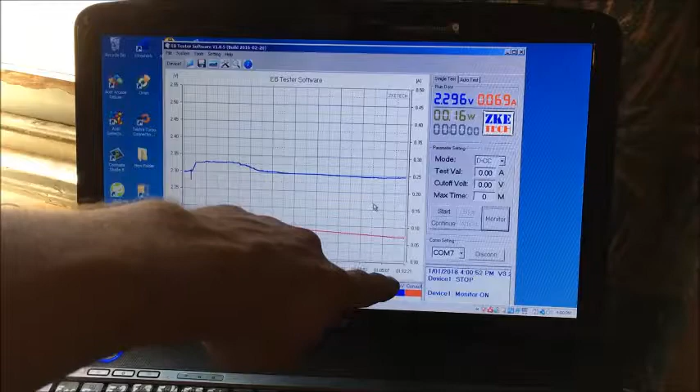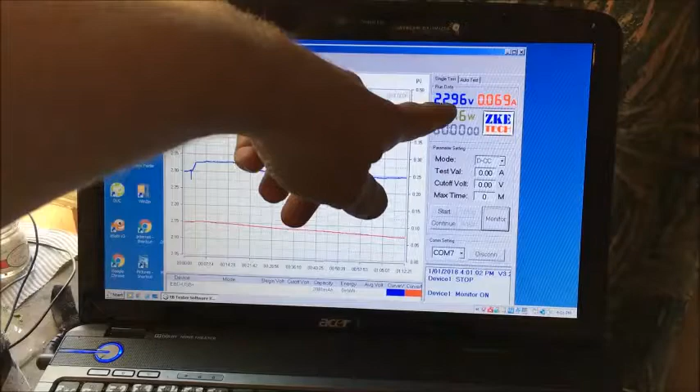So far we're at 1 hour and 12 minutes of charge. We're doing 0.069 amps, 69 milliamps, and it's slightly higher up here on this logger, 2.2 volts. I don't have the meters connected, I just got it straight through the data logger.

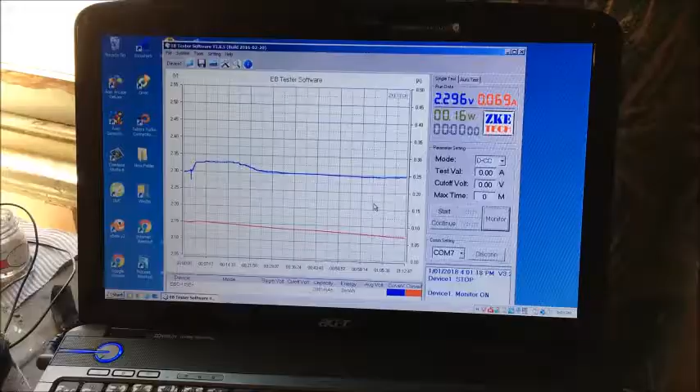The constant current load. And for the cell, what it's looking like. It's not looking too bad. It's got those little things growing down on the positive electrode again.

I haven't added any water. We're somewhat not too bad. The water level needs to be under that electrical tape on the electrode, or we could leak.

Going by the power curve, it's taking its time to drop. I might take it to a 3-hour charge, because the other night on a 2-hour charge it still was at 40 milliamps.

We could probably go down. It's worth checking anyway while we're doing it. It's only the 7th charge. But the two electrodes are looking like that's the way to go, though you'd construct them a lot better than that - they were sort of just whacked together just to see the concept.

I've got to really work on a kiln and resurfacing the furnace will be my primary goals for the upcoming projects.

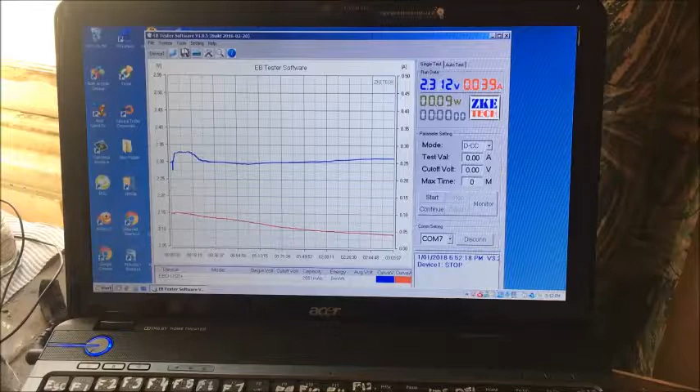Disconnecting power. And we're holding, I just disconnected the whole data logger. We don't need the charge cable. Connecting the data logger.

Okay, we're holding 1.8 volts, and on the multimeter we're holding 1.76. Oh yeah, we're dropping there.

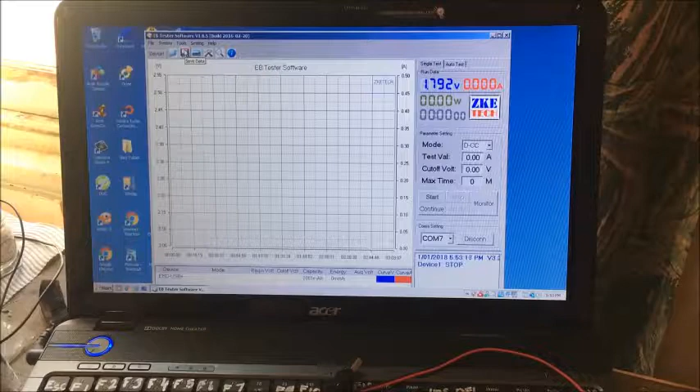Alright, I'll set up a time lapse and we'll do a discharge after a 3-hour charge and see if there's any difference.

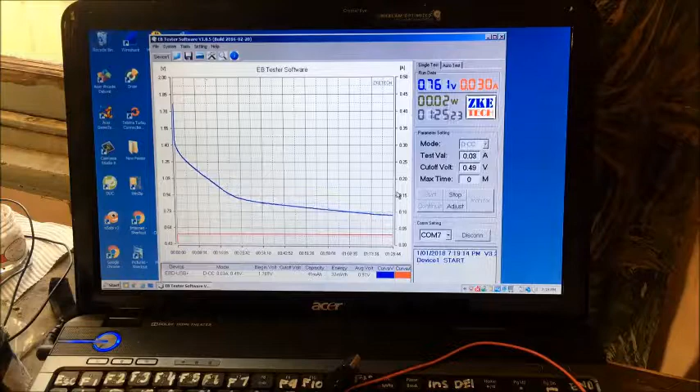Hi there, back after the 3-hour charge and a 3-hour discharge. It's quite surprising actually, a 3-hour charge on that cell. 74 milliwatt hours or 96 milliamp hours. That's not a bad run, and I'm pretty sure a 4-hour charge wouldn't go astray either.

But it's 9 o'clock now. A 3-hour charge would take me to 12. But it's somewhat held 1 volt for nearly 20 minutes, which was completely up on the previous charges. So overall results of a longer charge on this cell is not too bad.

And I need to move the light and everything over the cell. I can show it tomorrow. Might do another charge now and then leave the cell idle until I get back sometime tomorrow and see if it holds charge while it's sitting around.

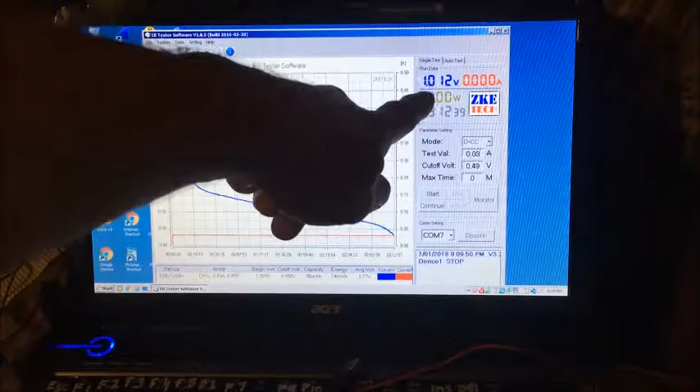So I'm quite impressed with this cell. It's not too bad, and the voltage bounce back is what you see there. And we'll just do another load test just to see. It should drop rapidly.

Yeah, zilch. It went to 0.5, stabilized, but we only took it down to 0.4, so there's power left.

Ah, that's weird. Yeah, I think the data logger's maybe having trouble here. When it spikes like that, I think the data logger's adjusting part of its circuitry - a transistor, or MOSFET or whatever it's got on there.

Enough of that little run. Alright, so I'll give it another charge for at least 2 hours anyway. I might get to 12 o'clock. See what happens. Alright, thanks for watching.

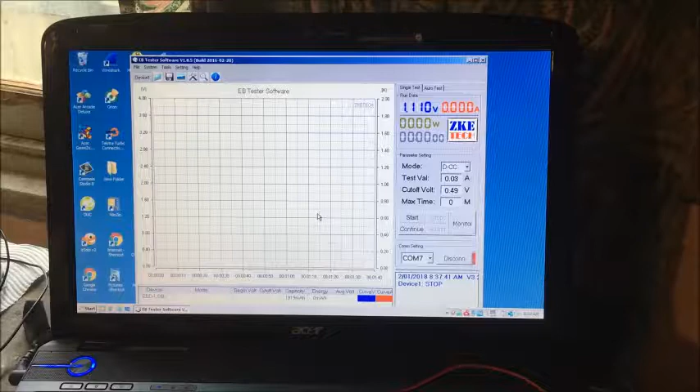Alright, it's been 9 hours idle. It had a 2-hour charge last night and rested overnight for 9 hours, and we're gonna hopefully get 50 milliwatts maybe. So we'll see what we got. I've got it set at 30 milliamps and the cutoff voltage is 0.49. So we'll commence the test and see if it's held its power overnight.

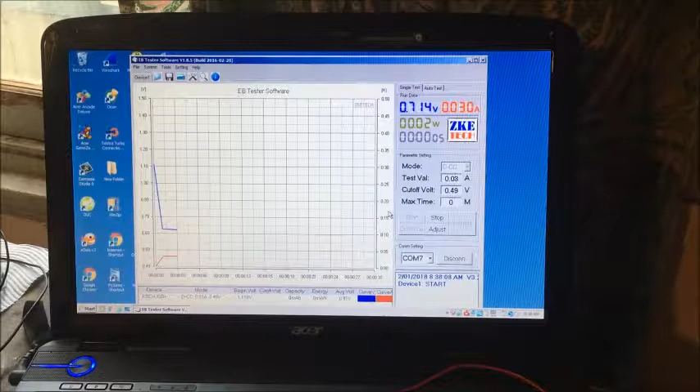We dropped pretty quickly there. So I don't think we're going to get like we got with the 2-hour test. It's only at 0.6. Oh, there, 0.7 on that one.

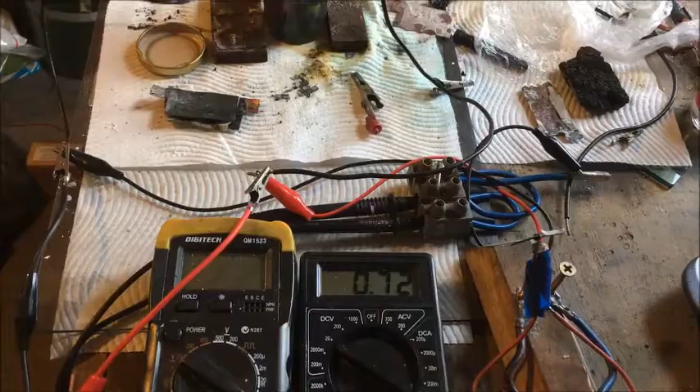And on the multimeter, 0.7, slightly up on the multimeter compared to that one. Alright, I'll let this thing do its thing and we'll be back later.

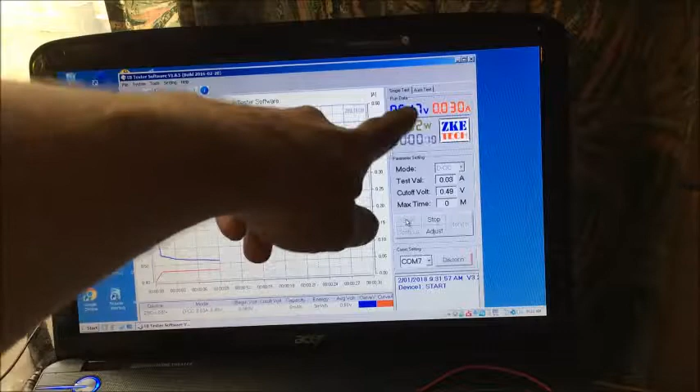Oh yeah, it does recover a little bit, slightly. We'll probably get another 15 minutes, but not worth it.

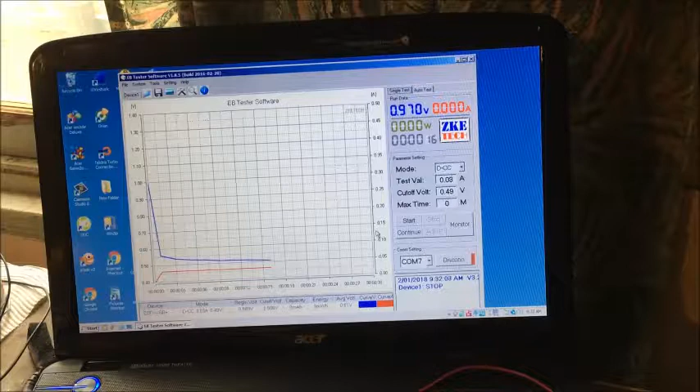Well, that's the 8th charge, so I'll have to go do some work now. But I'll get back later on during the day and try to get some more charging done to get to the 20. Alright, I'll be back.

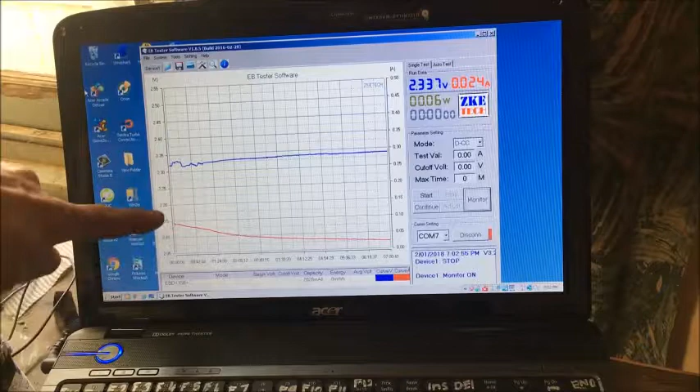Hi there. I was trying to get the milliamps down a bit on a charge. I've taken this charge all the way to 7 hours. It started off around about 90 milliamps and we're at 24 milliamps now after 7 hours.

I don't know how it's going to run. The cell looks pretty clean still. There seems to be more build up of that black substance. And the other electrode somewhat looks a bit thicker in density around it.

And there's some copper crossing down the bottom there. I don't know if it's coming off of the negative cell or coming out of the other cell, but it could even be bridged.

Oops. Well, probably ain't now because I just hit it. Alright, so I'll stop the charge, reset this, and then I'll do a time lapse of the discharge and see what happens. See if it actually gets more than the 72 milliamps on 3 hours or whatever it was.

Alright, till then. Oops, we'll check the voltage. I'll disconnect the charge. Charge is disconnected. Oops, I should have turned that off too. Still monitoring. Alright, we're at 2 but dropping. Alright, I'll get back when I set it up.

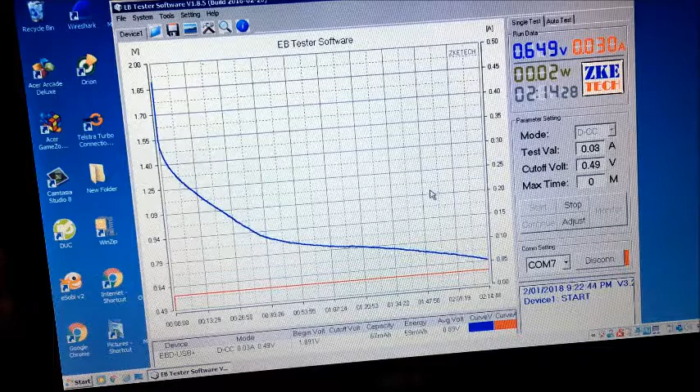Hi there. I think it was somewhat down in energy density. It's only 66 milliwatt hours after 2 hours and 35 minutes, and that was a 7-hour charge.

But wondering if it was the spoon. I bumped the spoon before the test, but I doubt it. So we could be running out of solution. The cell could be dying maybe. Too long a charge. Not sure.

That was the 8th charge anyway. The cell's pretty clean still. It's a bit dark to see. Alright, I'll continue the charging. Thanks for watching.

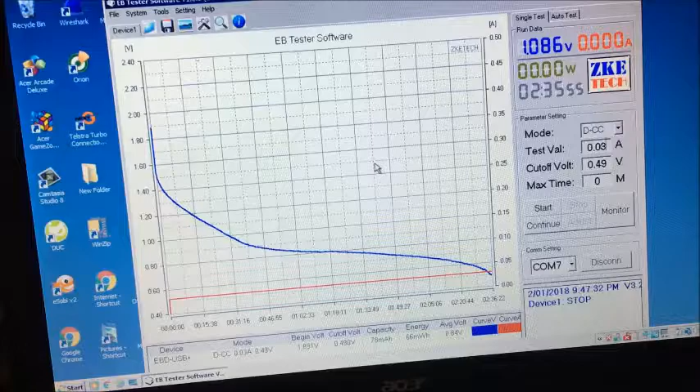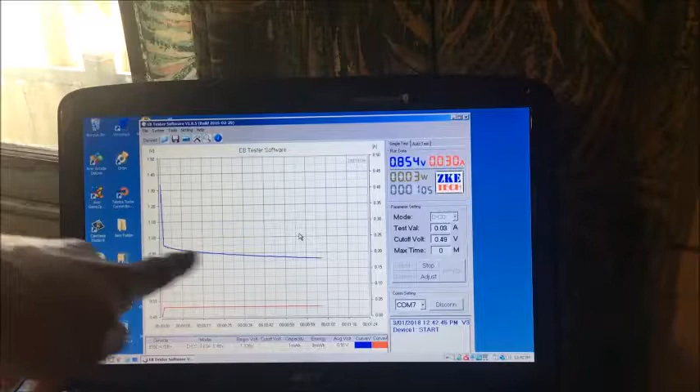Hi there. This is number 9 charge and discharge. Looks like the 7-hour charge has actually killed the cell big time. This had a 45-minute charge on 2.5 volts and it somewhat just dropped instantly, and total energy is only about 7 milliwatt hours now.

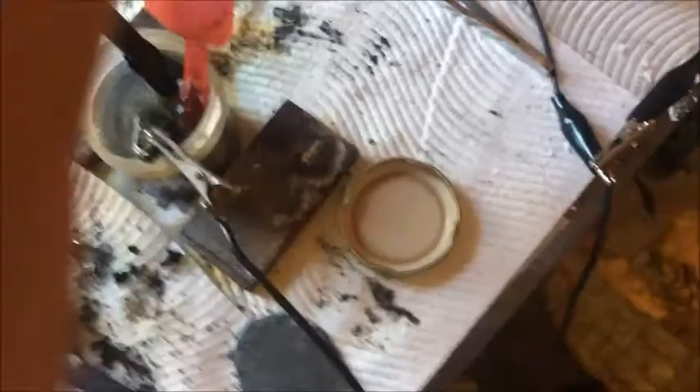And at the bottom of the cell, hard to see at the moment, but I sucked up some stuff and it looked pretty much like a nice layer of really fine copper at the bottom of that cell.

So I'm pretty sure the 7-hour charge was overkill. It did hold a voltage for much longer at a higher voltage, but the overall power density in a 7-hour charge was less than the 3-hour charge in the system. I'm gonna keep going until the 20th charge, and then I'm gonna change the electrolyte solution

to potassium hydroxide and give that a go. It's only a weak solution. Only have that much left. And see if that revives the cell.

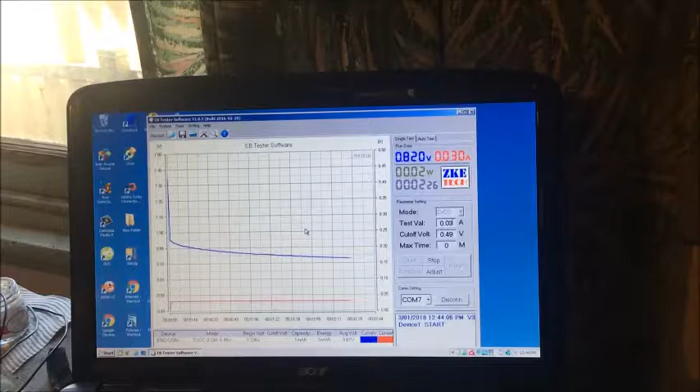Not sure if there's any material left in that cell. I think it's the positive cell which has collapsed. Alright, I'll let this do its thing and I'll be back.

The 11th charge update. Doesn't seem to be dead. It was just a really good power curve from, say, half hour on the 7-hour charge cell, and everything else I dropped it down in charge time.

This one was an hour's charge and I put it up to about 2.5, and it seems to be holding not too bad. Milliamps is down still, I reckon.

24 milliamps. I think it's at its peak it did 72 milliamps, milliwatt hours. Sorry. Yeah. Still, this is what I got. 9 more to go.

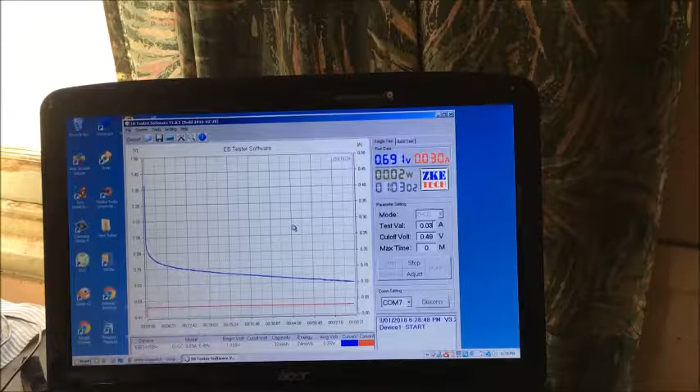Hi there. Finally made it to the 20th charge on the carbon zinc cell with manganese dioxide as the positive electrode.

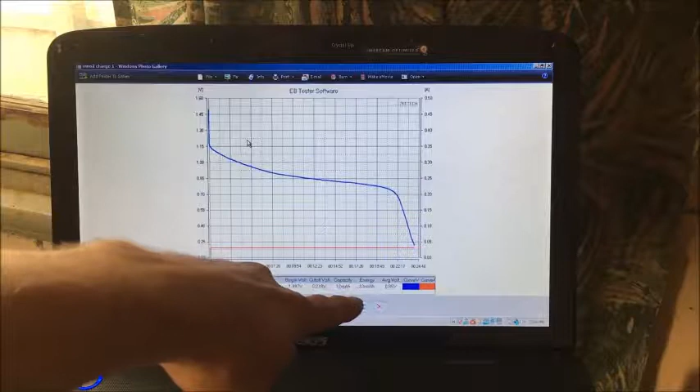This is the first charge, the very first. It was only a half hour at low voltage, something like 1.8 or something. So it got 10 milliamps, and the second one was somewhat a bit better, gaining 13 milliamps. Third one was 29. I'll have to check on the charge times.

I've changed the charge time but kept the voltage the same. This is number 4. We're at 19, and then I'll close this.

And down near the 20, somewhat lost a lot of energy. I think the copper's doing it. I'm going to try another experiment without the copper around the electrode.

And number 20 was only 10 milliamps again, but on an hour's charge at 2.5 volts. I increased the voltage after about charge number 10 or something.

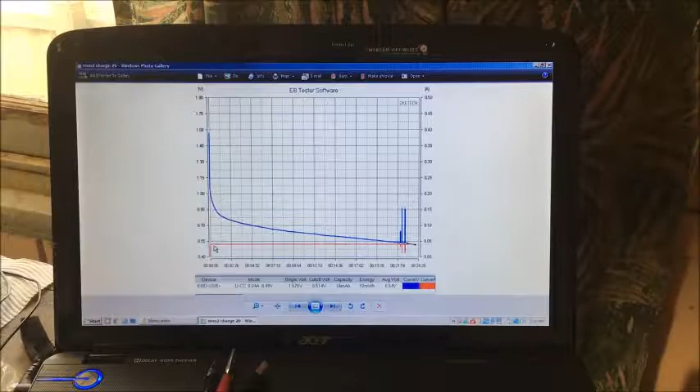I've got the records there. So it's currently been charging up on about 2.5 volts. It started off at 90 milliamps and it's still at 38.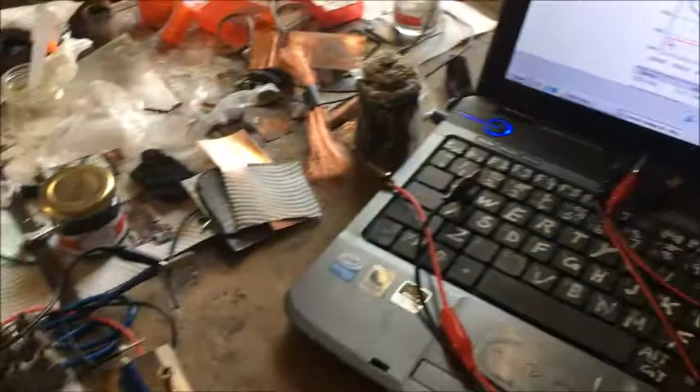So we're going to see if it is dead or a longer charge is actually needed. Alright, I'll set that up and I'll run a time lapse of the discharge, and I've been running it on 40 milliamp load to sort of speed up the tests a bit.

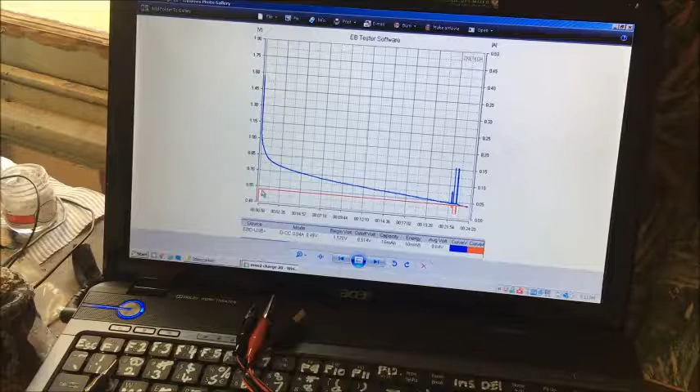Alright, I'll be back when the power curve's finished.

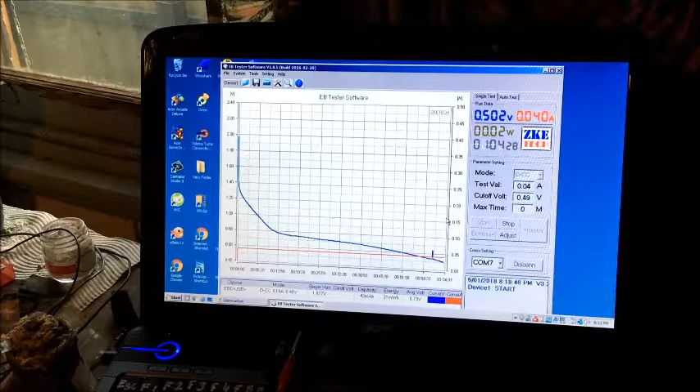But the cell's still functioning and still quite clean. Seems to take more power to charge it though now, for some reason.

So that carbon chip has had 40 charges, or a couple more than 40 probably, and it's still holding up, so that's much of an improvement on a zinc, just a plain zinc cell. They're pieces from the other tests of zinc.

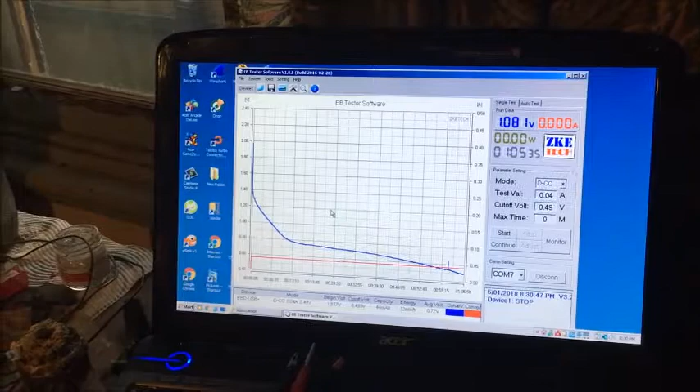Alright, so that's the test. I got a comparison chart of the 20 of this cell runs and 20 of the other ones. I'll post that on at the end of this video, and I'll put all the power curves up. Alright, thanks for watching.